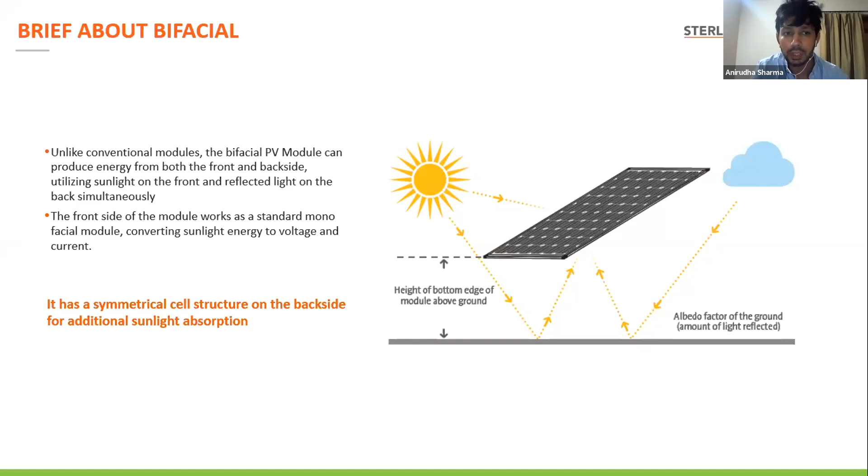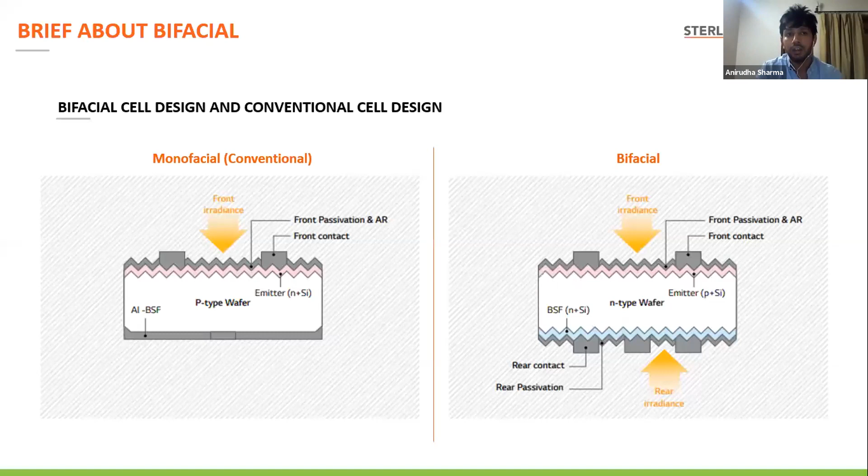If we talk about the difference in the technology of the cell, I would say you normally manufacture the bifacial cell in the factory in a similar way. The only difference is instead of the rear back sheet, we will have a rear contact or rear passivation for the cell, by which we are able to generate electricity from both sides. And this is just a classic example to demonstrate what we just talked about. We are not using a white sheet.

Careful with the mic again. You were fine, and now it's dropping off. Just careful with it. Okay, I will try to hold it in my hand.

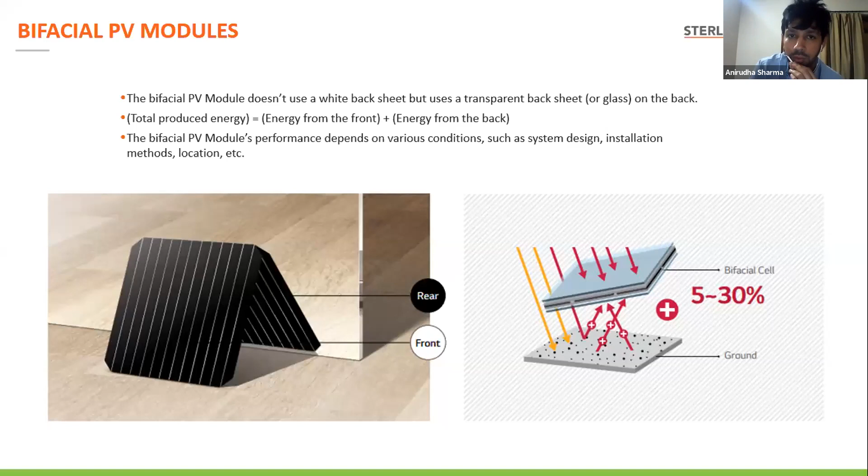So basically, the bifacial PV module performance, like I said, does not depend purely on the modules, but there are a lot of other external factors like the albedo, the way the installation is being done, the ground conditions. All of these are also impacting the generation you can expect from the bifacial module. So as an EPC, it is very important to factor in all the other conditions other than the module, which is definitely going to be a key technology. And the tracker, which my friend Jose will be talking about, how the tracker suppliers can play a very important role in terms of boosting the gains from bifacial cells.

So when we talk about bifacial, the important thing we really need to know is albedo. And what is albedo? Albedo is basically the reflectivity of the ground wherever you're installing your solar plant. And this value can vary from 0 to 100. So normally what we have seen, the whiter the surface is, the higher the albedo will be. Similarly, if you go to a blacker surface, which has the characteristic of absorbing the light, the albedo will be less, and the gain on the bifacial module will be relatively less as compared to the white surface.

If you could see this chart on my screen, basically we have tried to capture the albedo for some of the characteristics of a particular site. Like I said, the albedo for the white surface will be highest. So for snow, it can vary between 40 to 90. For ice, it's less. For water, it's relatively much lesser because of the absorption power.

So basically why I said in the Middle East we are seeing a lot of projects shifting to bifacial is because if you look at the albedo for sand, it is varying between 20 to 40, and anything above 20 means that you could expect a gain of minimum 4 to 5% on a bifacial module compared with a monofacial module. So this is one of the reasons why the bids are now shifting more to this technology.

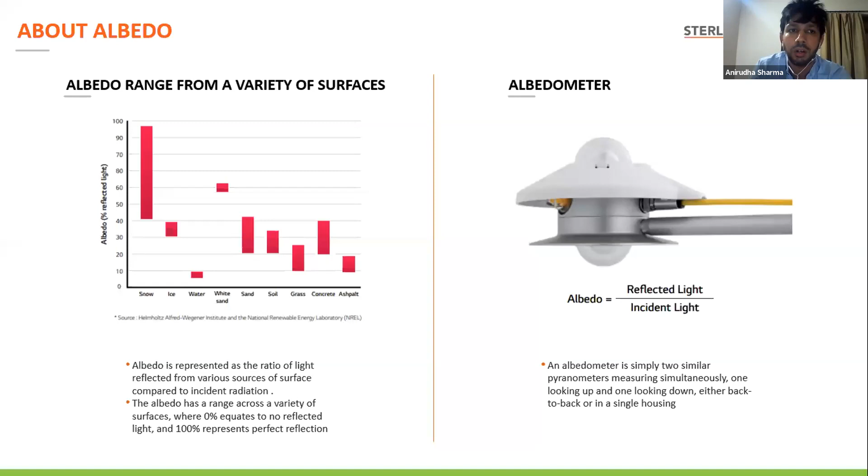Two pyranometers, one facing upside and one facing downside, trying to capture the irradiance from the surface and from the sky, and then it is the ratio of reflected light and the incident light, and that's how you calculate the albedo. It's a dimensionless value, so there is no unit to it. It can vary, like I said, between 0 to 100.

There are different other ways to capture the albedo or to determine the albedo. One of the easiest ways is to look for a table like the one I have shared with you. So depending on the ground condition, and if you have some of the pictures for the particular site, you can imagine what could be the expected albedo out of the project.

The second way, which is more accurate, I would say, and the more recommended one, is to capture the on-site measurement of albedo. How do we do it? We install an albedo meter. We do these studies ranging from a few days to a couple of months. So basically, as an EPC, we feel more comfortable if we are able to capture the data from on-site measurement, because we are able to bring down all the uncertainties in the project.

If we are not able to do so, we also have an option to go for the SolarGIS data or the satellite data for the albedos. But typically when you are using the SolarGIS and satellite data, you always have to take a certain cushion on the uncertainty for these values.

So when we do the albedo installation, our recommendation is to capture the albedo not only at one location, but at different locations, depending on the capacity of the project we are looking at. For a 50 to 100 megawatt project, at least 2 to 3 locations are recommended for the measurement of this albedo. And this measurement period can vary between a day, a week, or a month, depending on how much time we are able to get.

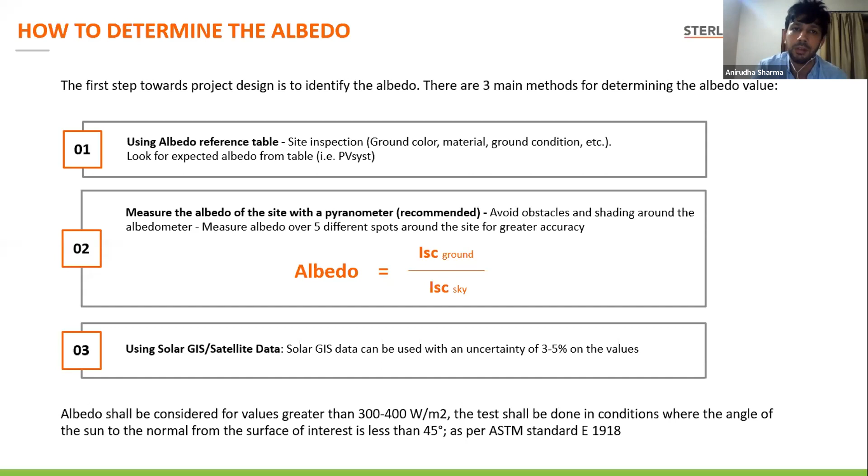So what are the things we really need to factor in when we talk about the installation side? There are a few things. Like I said, it's not only about the module, but the tracker, which is one of the key technologies that helps in playing with the albedo a lot. One way is the height of the tracker: the higher you go, the better the albedo will become, because the reflectivity index will be better. So the angle of inclination is a key aspect by which you can improve your albedo.

But of course, if you keep on increasing the tracker height, there will be additional factors we need to factor in, like wind load, if you install the tracker at more than 2 meters height. Secondly, the foundation will become deeper and stronger, which is again a capex-related point. So whenever you're taking a decision on the ideal height for installing the modules on the tracker, the only way to decide is the LCOE.

So we do the simulations for a particular project at various heights, and depending on the heights, your OPEX is also varying. If you go for a 2 meter or 2.3 meter height of tracker, the OPEX will also vary, because then you have to clean the modules at a slightly higher height, and the entire arrangement will be slightly different from the nominal one in the conventional way of cleaning the modules.

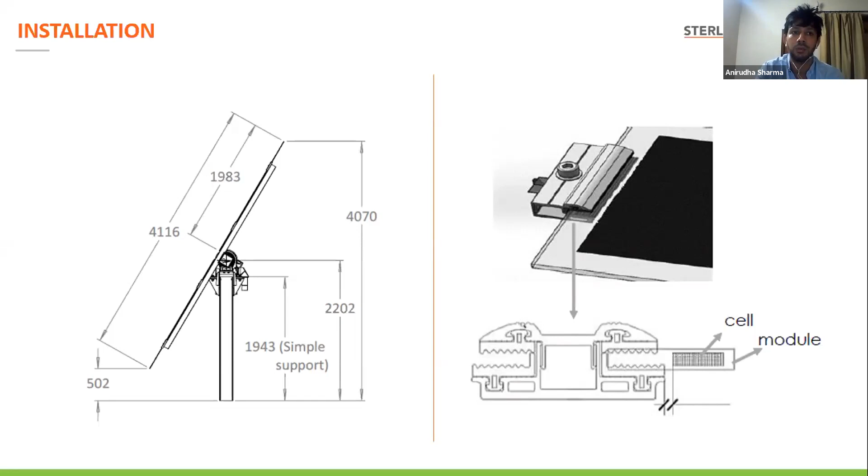Secondly, let's talk about what changes in terms of your BOQ. So when you're shifting your technology from monofacial to bifacial, what all will be the possible changes? One change, which we all know, is the number of inputs going up, because your combiner boxes are going up, and the number of inputs to your inverter will again be going up. There are ways to reduce it.

If you are able to get access to 40 ampere, 50 ampere fuses, it is possible to use a Y connector. But initially, when bifacial was turning out to be more conventional or more popular, people were struggling to use the Y connectors. But now we have the solution in terms of the fuses. Second is the DC cable will definitely go up, so it means your trenching requirement will go up, and there will be a slight increase in your overall installation cost and in your BOQ cost.

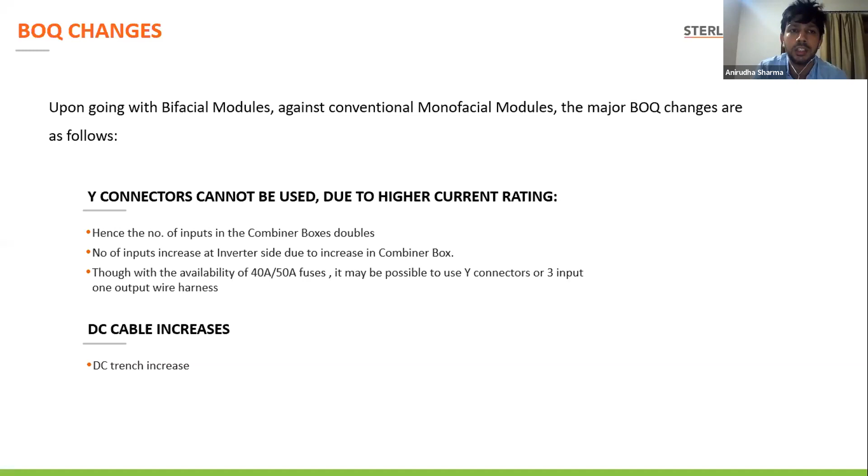So these are the main changes in terms of the BOQ. We will talk about more economical considerations between these two technologies. One is module.

Even between modules, even between bifacial modules, like I said, there are frameless ones, then there are two types of technology, P and N type, and then we have HJT also. So the module pricing can vary among these technologies as well.

But the good thing is, between mono and bifacial, earlier there used to be a differential of almost 2 cents in terms of the capex of the module, which has come down drastically. This means for the same site, there may be a possibility to shift the technology from monofacial to bifacial without much capex increase, which is definitely turning out to be a game-changing technology for all of us.

Secondly, in terms of balance of system, tracker is one thing. People are still spending a lot of R&D on this. A lot of tracker companies are coming out with new innovations. There are companies claiming increase in the albedo value through the foundation solutions they are proposing with the tracker. So there are different ways of playing with the albedo and overall gain increase, but it all comes at a cost, such as the increase in tracker cost as we go higher on the height.

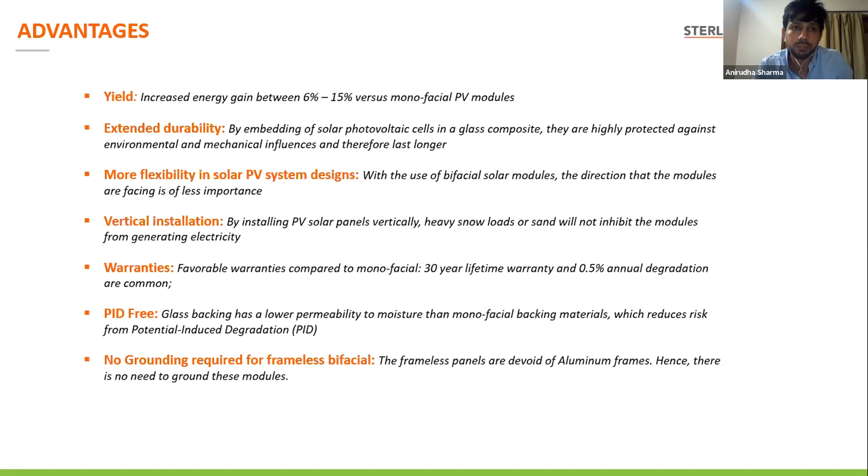What are the issues and disadvantages? We talked about the advantages for bifacial, but what could be the possible issues with this technology? One is because we are using glass - they are double glass - the weight of the module becomes heavier, which makes the tracker cost go up. Because of the heavier module, the tracker needs to be more heavy, and the structure becomes heavy.

Second, the albedo - maintenance of the albedo - this is purely OPEX cost. If your ground conditions change over a period of time, it will definitely impact your financial model or your financial understanding from the beginning of the project. So it's very important to give enough emphasis on how we ensure control of the ground conditions to ensure the albedo is not changing drastically over years.

OPEX, like I said, is higher compared to the normal standard maintenance we do on the monofacial module. Some questions are still unanswered on the backside cleaning of the module, but I think we'll have some solutions for this sooner.

Whether framed or unframed modules - people ask these questions a lot. Unframed modules tend to cause less backside shading, but all of this is related to the site. I think we cannot conclude in black and white that bifacial frame is better than unframed or unframed is better than frame - it's more dependent on the site characteristics. But one important thing in both cases we really need to factor in is the rear shading.

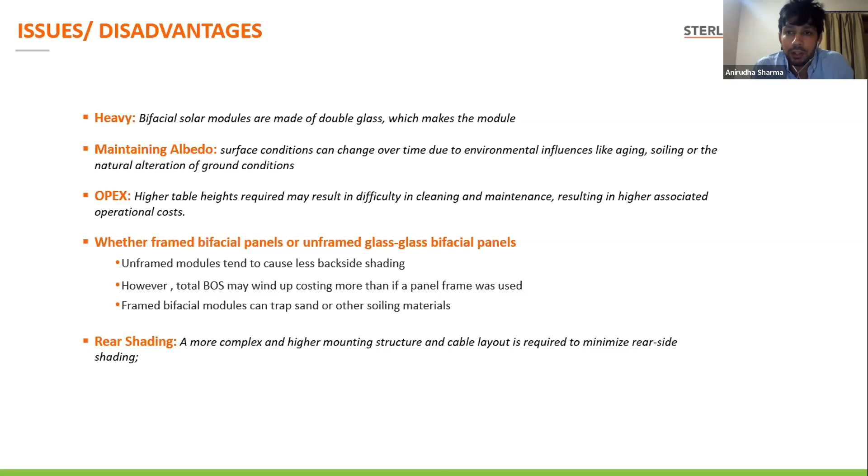And what is the way forward in this technology? I talked about vertical installation, which is useful for areas which have heavy snow load. By this kind of installation, we can definitely negate the load on the modules because we are installing the modules vertically. It helps us in increasing the yield further by 10 to 20%. So if you are expecting a 15% gain on the bifacial, by installing vertically you can expect a further additional gain of 10 to 20% on the bifacial.

The second technology we are working on is the double peak profile. Basically, it's a kind of east-west, but again with bifacial modules. This again helps you in improving the generation drastically.

And third is a technology which is relatively new, and we still need some more time because the albedo for water is not as good as we have seen for the ground. But people have started exploring and doing a lot of R&D on this side: floating bifacial. I think it will take some more time for floating to be successful with bifacial, but with the kind of innovation we are seeing in the industry on a weekly basis, it could be a possibility.

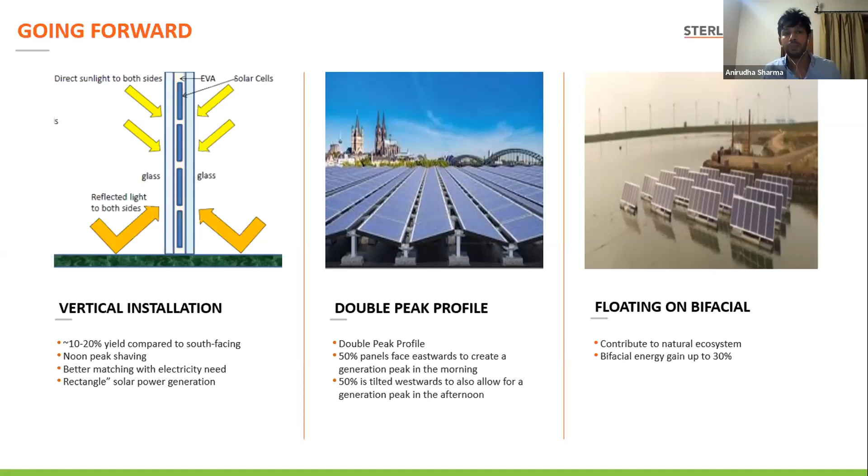So just to summarize, as an EPC, we are comfortable with all sorts of technologies. We have seen the advantages and disadvantages with mono, with bi. Each technology has its pros and cons. It's more about site-specific characteristics, what we really have to look at. And the way the industry is moving forward, we will have slightly more innovation even on bifacial very, very soon. So thanks a lot, Belen. I would like to summarize my presentation there.

Thank you very much. It was a long but very interesting and very detailed presentation. I'm going to ask you to take your screen off so that, Jose, you can prepare yours. And one thing, we have a lot of questions, and I know you're very good with your typing. Because we're not going to have a lot of time at the end, please answer those by text if you may. Jose, can you please turn your microphone on? There's a bunch of questions very specific to trackers, so we can go to those later. Perfect. Can you make that larger? Yes, perfect. You're ready to go. Okay, I will start my presentation.

This is about designing bifacial PV projects, specifically with solar trackers, and I will talk about our PV field experiences with bifacial technology. This is the index of this presentation. I will introduce Soltec with our track record so far with bifacial technology, so you have an idea of the reality this technology already is today. Then I will tell the story of our bifacial experience since 2015, our first plant, till this year.

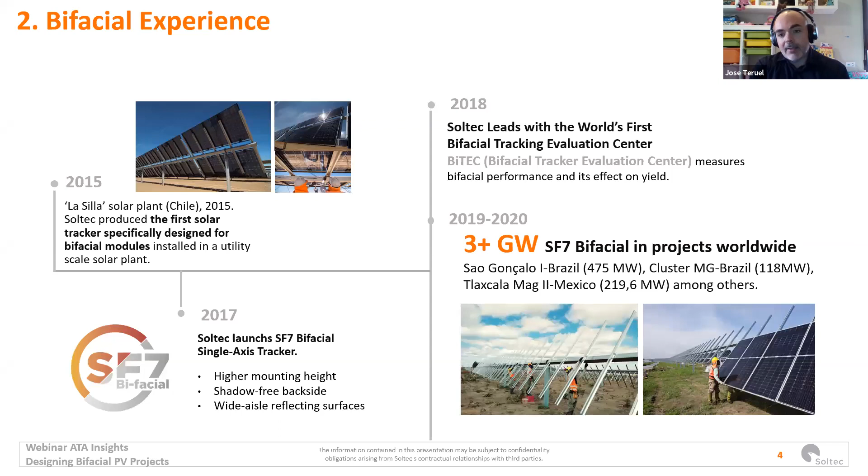Starting with La Silla, it was a special site because it's a commercial PV plant, 1.8 megawatts divided in 3 fields. One of them was with standard modules, another one with standard modules with optimizers integrated in the junction box, and the other field was with bifacial modules. Okay, the GCR was 0.33, and this is how it looks like.

This was the tracker that we installed. We left a huge gap in between the torque tube, the modules on the torque tube, to avoid any shadowing. We also left some open spaces in between each 4 modules. We left open spaces just to make sure the light was going through the structure.

And the results for the first year in that PV plant were already shared by our customer. The average was 13.3 bifacial gain of the bifacial modules versus the standard modules.

We also got the results for the modules with the optimizers, and they realized that it didn't make sense to use that technology because it wasn't paying the effort of increasing that performance. But the bifacial is clearly increasing the performance and not affecting that much the capex of the installation.

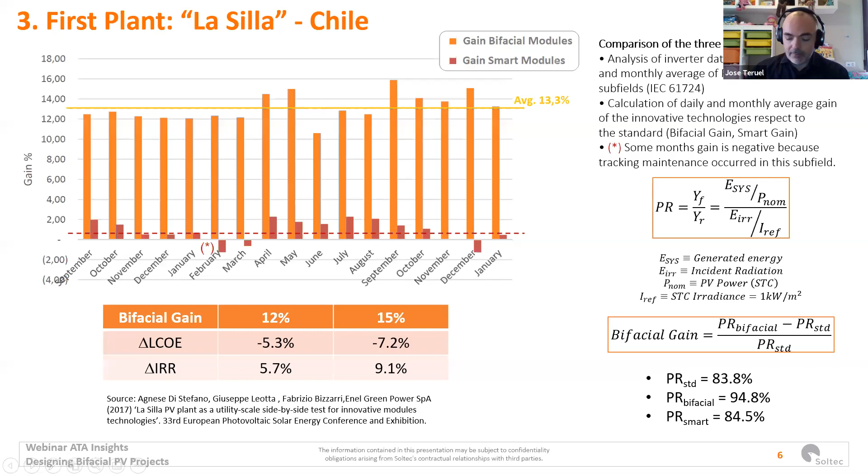I will go over these details and start talking about the Bifacial Tracker Evaluation Center in Livermore, in California. This plant that we installed in California is made up with 28 trackers, and we wanted to get long-term bifacial tracking data from different scenarios. We wanted to recreate conditions equivalent to large utility-scale PV plants, and we wanted to characterize all the variables affecting the bifacial performance, like the albedo.

Albedo is the most important variable, the most important factor to take into account with these plants. GCR is also very important, the height to the ground, and shading and interferences of the cabling and the tracking structure. So we want to get the bifacial gain, taking into account everything and playing with all those parameters in this plant.

Our main target was to optimize our tracker to get to a better design than our current design, to develop advanced bifacial tracking algorithms, and also to improve the simulation parameterization. And this is something very important because it's hard to get to an agreement with all the models and how to simulate accurately these bifacial sites.

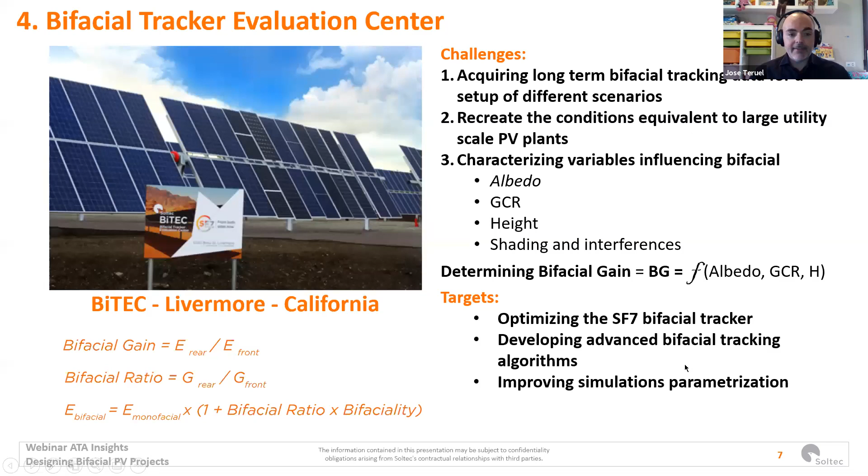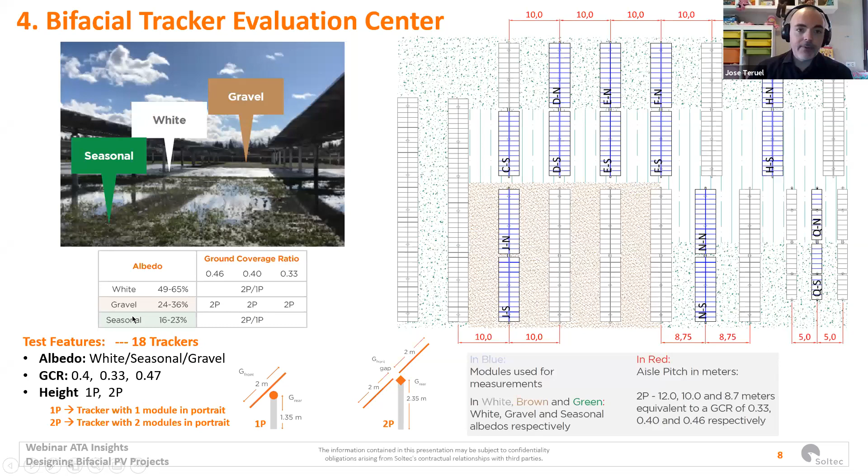So after the first full year of field data in BITEC, here we represent the results of the bifacial gain for different albedos. This is the 19.9, the seasonal albedo, and this is how it was changing with the seasons. We have fall in yellow, winter in blue, spring in green, summer in red, and the full year in gray. The gravel average 29.5, and for this white material, initially white, then it changed a little bit. The average albedo for the full year was 55.6. We can see a bifacial gain ranging from 7.3% to 15.7 in the best case.

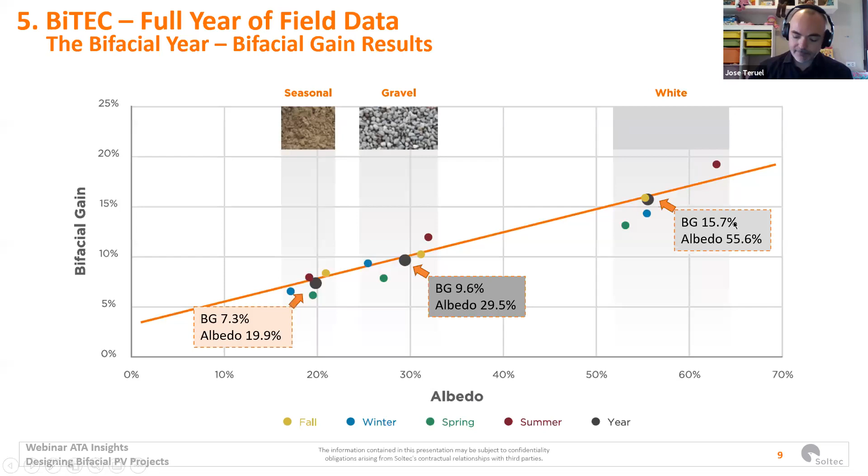In this slide, we can see a comparison of the results for the best albedo situation, 55.6, comparing the 1 portrait and 2 portrait tracker configurations. And this is how they perform based on the same modules and the same GCR configuration, but 1P versus 2P. We can see how at the end of the year, we get 15.8 in the 2P and 13.6 in the 1P, and how it was constantly over the 1P during the whole year. These results are based on energy performance at module level, okay? And only the internal trackers were considered.

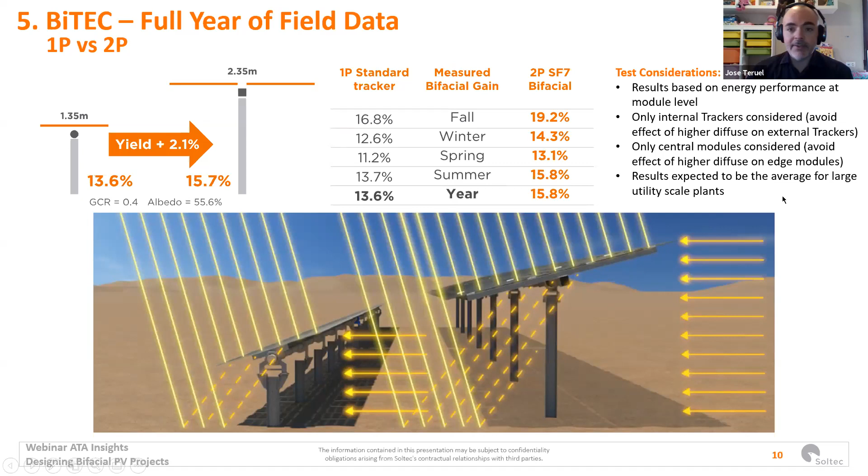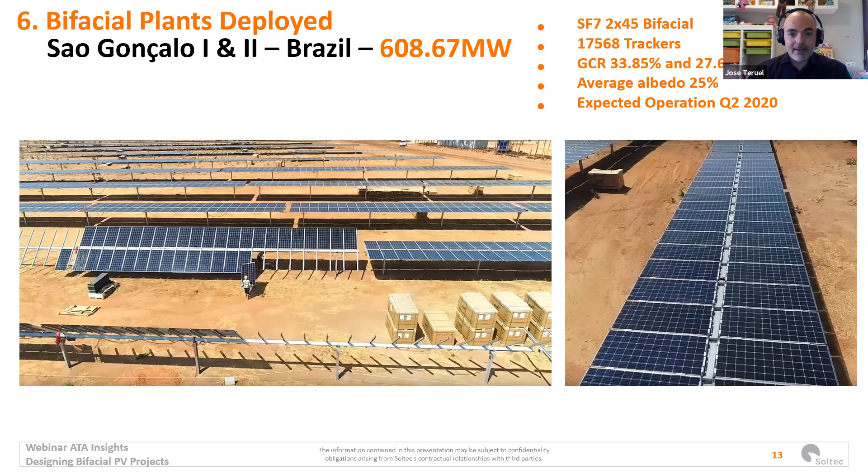This is another example, Sao Gonçalo 1 and 2 in Brazil, adding 608.67 megawatts in a single bifacial plant with trackers. You can see here the Jinko modules, the Jinko boxes. This plant is so large that it started last year and is still under installation and commissioning. We have 17,568 trackers in this single plant. And in this plant, they are playing with two different GCRs due to how the layout was designed. The average albedo of this plant is 25%. So we don't expect them to add anything to improve this albedo, probably. And these are two realities of plants that are encouraging our customers to continue with this technology and also with our results.

I will finish with the O&M considerations. These are examples of how our test site in Livermore, in California, was changing along the year. It's the same piece of land, but with a lot of colors. So this is something to take into account, to have in mind that if we want to keep a constant, or if we want to guarantee some average albedo level along the year, we have to take care of the ground, and we probably have to work more.

Also, some other things to consider: the bigger the spaces in between trackers, the easier the access for cleaning and for removing the grass. So if you have big machinery for removing the grass, you will need a big clearance in between trackers. So for the same GCR, if you install 2P trackers, you'll get easier access under the tracker.

As you can see here, these 1P trackers are so low to the ground that the machine wasn't able to access the center part. And this is affecting a lot the backside of the bifacial modules. This point I already mentioned: the clients need a guarantee on an average yearly albedo, and this is something that the designers, the plants, the tracker manufacturers, and the people working in O&M have to consider.

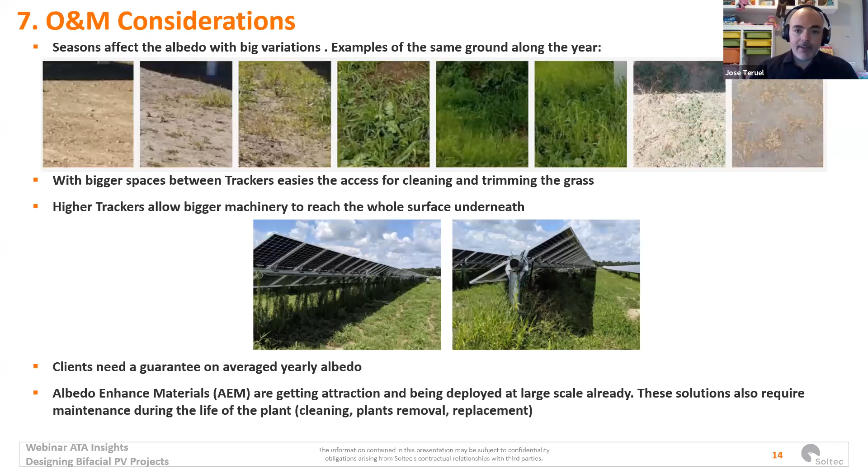Albedo enhanced materials, what they call AEM, are getting traction and are already being deployed in some large-scale plants. And we are also working on some product around this together with our trackers. And these solutions also require maintenance during the life of the plant. You need to clean the material, you need to remove the plants around or underneath, and in some cases you need to replace them during the life of the plant, and that's something to consider.

And here are our conclusions. Okay, the main influence is the albedo and the seasonal variations. We can play with the albedo, we can ensure the albedo and guarantee some values, but there will be an extra cost for the O&M. So it has been already 5 years since our first commercial plant with bifacial trackers. It was La Silla plant, and that was a very good start for us. The data from that plant is encouraging us to continue with this technology.

Our clients who have already tried our trackers and bifacial plants have the numbers, and they are continuing, they are repeating with our technology. From our BITEC plant, we get 15.7% of bifacial gain with reasonably high albedo, and 7.3 with seasonal albedo. These numbers are already quite good and higher than expected initially.

And we also should mention that the bifaciality of the modules is improving lately, so we can expect much more from here. Also, the material we use for improving this albedo is not the best. We are testing with much better materials, and we can expect this number to go higher this year.